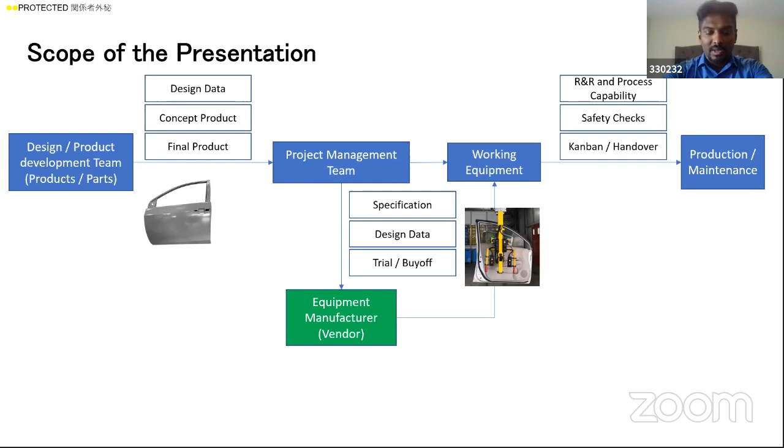So basically, even that is project management. You can see each and every activity in your home as a project management - it's like a one-time activity. You just take that process, execute it, and hand it over to the person who is going to use it. So our focus will be mainly on equipment and process design in this management scope. That's how you engineers will also start your career - you'll start with technical aspects of process planning, and then get into the project management field.

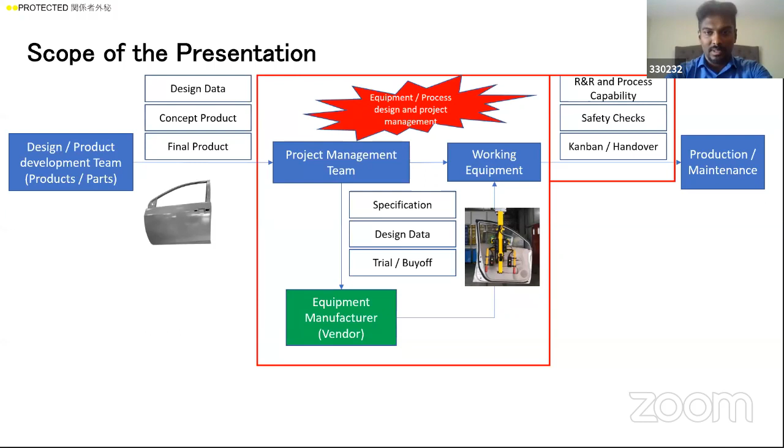So in this presentation, let's take this one door as an example. In vehicle assembly process, we'll have the shell body of the vehicle coming into the assembly shop, and we have to take this door out and send it to the door assembly process. Let's say we are going to build an assist for this. This door will be heavy, so one operator, one team member, cannot lift this door. They need an assist that can help them lift this door and send it to the next process. Let's assume we are in the project assembly department now, and we are going to build this equipment.

So what we will receive from the design department is the design of this door, concept of this door, maybe a concept vehicle door. We'll get that information from the design team, and now we are going to write a specification for an assist that can pick it and load it to the next station. So that's our job - let's say we are just breaking it down into a small project.

In an assembly like this, there will be more than 50 or 60 equipment. For example, if we are going for a big design change, from one model of a Lexus to the next model of Lexus, we may have to modify or buy 50 or 60 new equipment. This is how we start a project management, move forward, make it work, and hand it over to production with some studies that we do.

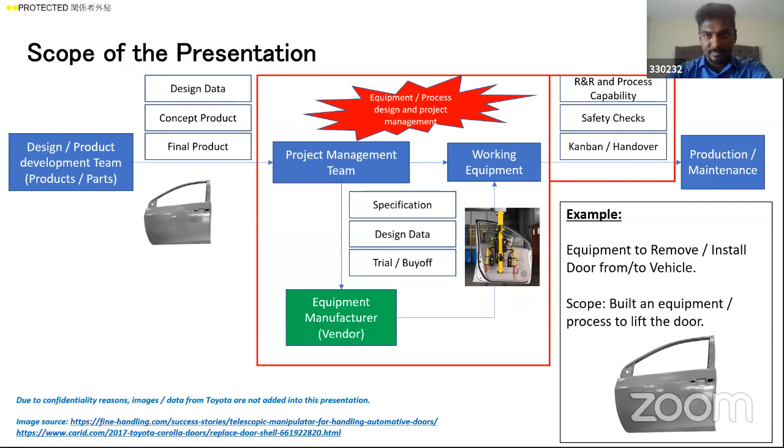Okay, I'll take that as a yes. Yeah, yes, Karthi, yes.

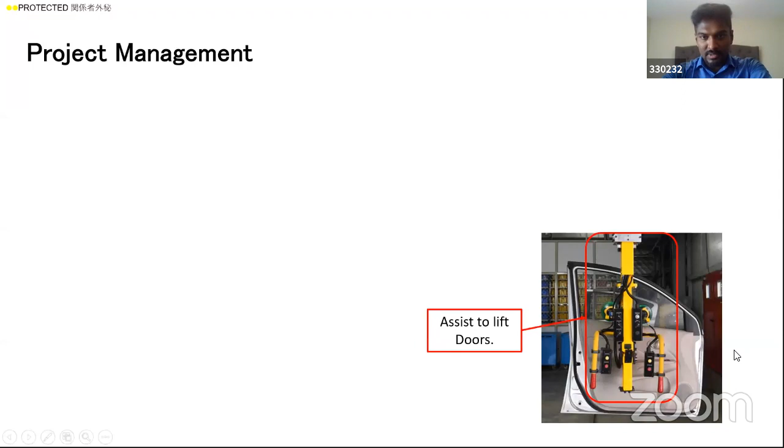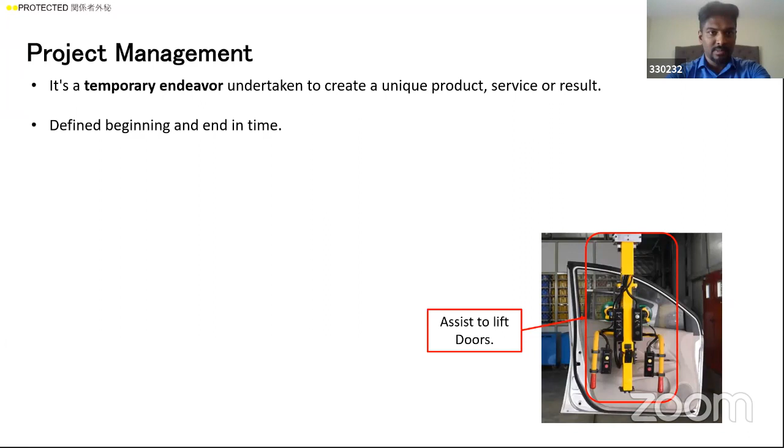So project management, let's say for this lift assist, that's what we are going to talk about. It's a very temporary endeavor, not a regular activity. It's a one-time unique activity with a defined beginning and defined ending. It's basic project management principles, unique for that particular operation, not a routine one. You start that project, implement it, and hand it over to production, and your scope ends right there. Project management has different phases: you initiate a project, plan for it, execute it, monitor for some time, and then close that project.

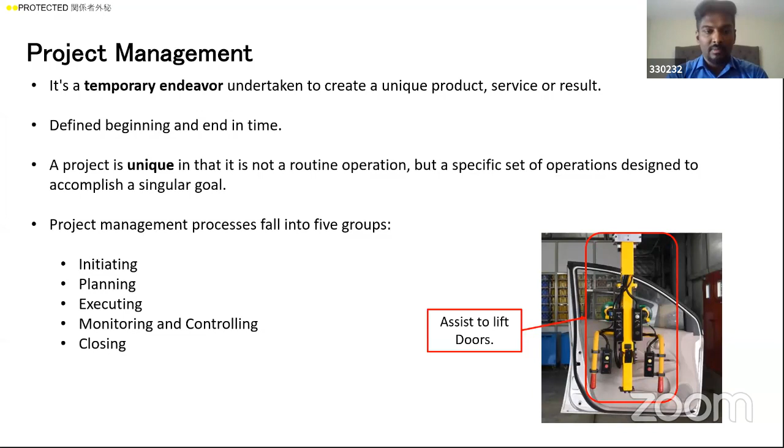The next type of project is the relocation project. You have a setup already in a different location, and you basically relocate that and make it work for the current shop, like in India, for example.

Then you do a kaizen project, where you already have a setup in your assembly shop making, say, 500 vehicles a day, and you're going to increase it to 1,000 vehicles a day. You're basically increasing the capacity of the shop. So what you do is add some equipment, increase the capacity of the equipment, or reduce cycle time.

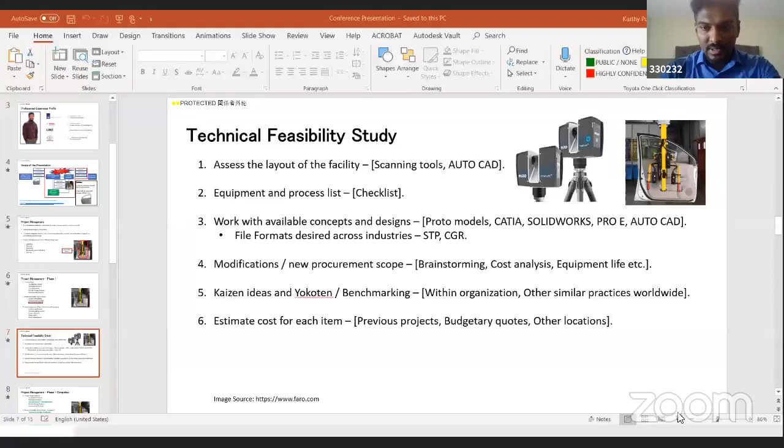Karthi, sorry to interrupt, but we are not able to see any presentation, we are only able to see you, not the presentation. Okay, let me check. So from this screen, you stopped looking at, are you okay? Yeah, we are now able to see the technical feasibility study. Okay, I covered this, you saw this one. Up to phase 1, we were able to see. Okay, so I hope until now you are clear on what we are talking about. Yeah, yes, okay, I didn't check the chat box yet, I'm not sure if there are any questions from participants. There are a few questions, but we can take this at the end of the session so that the flow of the session will not be disturbed. Okay, yeah, okay.

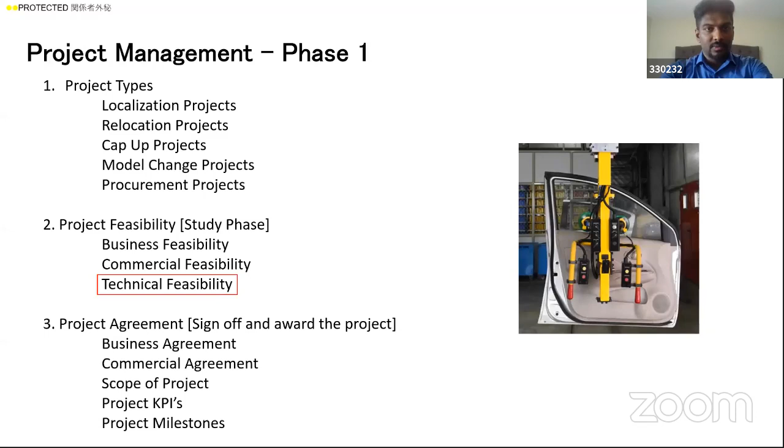Okay, so phase one is completed, and then we are going to focus on technical feasibility a little bit, and then move on to phase two. So in technical feasibility, the first thing is we are going to see if we even have a space to do anything. So first thing, what as an engineer you guys will be doing is you just take some scanning tools or take your tape measure.

Trust me, you will use tape measures and steel rules and other basic measuring equipment more than all these hi-fi technical scanning tools and stuff. As project engineers or project managers, you don't have to deal with scanning tools or design analysis tools directly. All you'll be doing is managing people to get these things done. But you should still know these equipment exist and their functionality and uses, though it's just based on your interest.

First thing you'll do is check the layout, whether you even have any facility to do the equipment, or can we even install the equipment here. You basically do that with scanning tools and AutoCAD, make some layouts and do a preliminary check. This is a high level check, because it's phase one, we just have to say okay, is this even possible to do here or not.

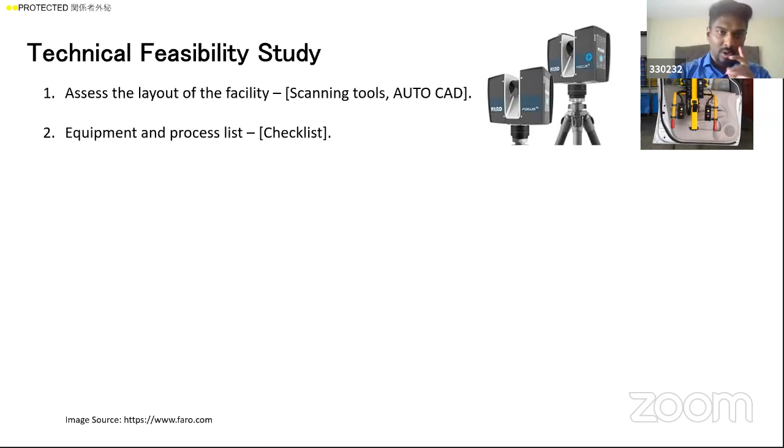Then you go for the equipment and process list. In our example, we just chose one equipment, but in an assembly line you'll have 50 to 60 equipment. So you have to list down all the equipment that need to be modified for a particular vehicle or model change, and list what needs to be modified or bought new. That's a basic small Excel sheet checklist where you list down all the equipment with asset numbers and everything.

Once you're done with that, you go with the available concepts and designs. The product design department will give you the concepts and the design, which can be in CATIA, SolidWorks, Pro-E, AutoCAD, whatnot. There are tons of software out there, but basically we use CATIA, SolidWorks, and Pro-E in Toyota. They may also give some proto models to us, depending on which phase of the project you are.

So let's say, for example, a design change or a new model launch. Initially we'll just get 3D models of a vehicle, 3D models of a door, whatever, usually in STP or CGR formats, which is the most commonly used format that people share to different vendors or locations. With that information you start checking: I have this 3D model, I have this layout, can I even make this equipment work for this in our industry, or in your plant, or in your home, whatever.

Then you go for modification or new procurement scope. As I said in point number two, you list down, let's say, 50 equipment, and you have to decide whether I'm going to buy new or modify the existing one. There may be equipment that's been working for 20 years and can still work - you just modify it a little bit or reinforce it, and make it work until the next model change, maybe 3-4 more years. Or you may have to buy completely new and make it work for the next 20 years. That's the decision you need to take, brainstorming with production team members and production managers.

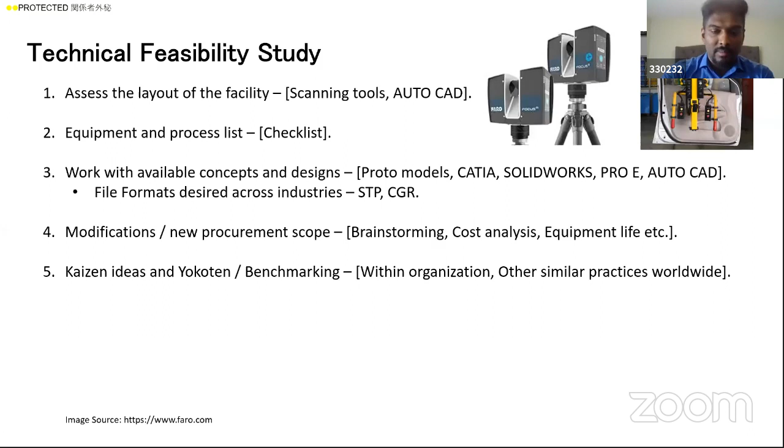Basically you do benchmarking. Once everything is done, you estimate the cost of each item. You've decided whether you're going to modify or buy new, you have all the Kaizen ideas, you know what equipment needs to be modified, and then you just put some numbers to that - get some budgetary quotes from different vendors. You'll have so many vendors who can make these kinds of assists.

Just talk to them and get some budgetary numbers, then attach that to the Excel sheet. So now whatever you have in your mind with all the technical knowledge basically gets turned into numbers, and with that sheet, you're basically done with your feasibility study.

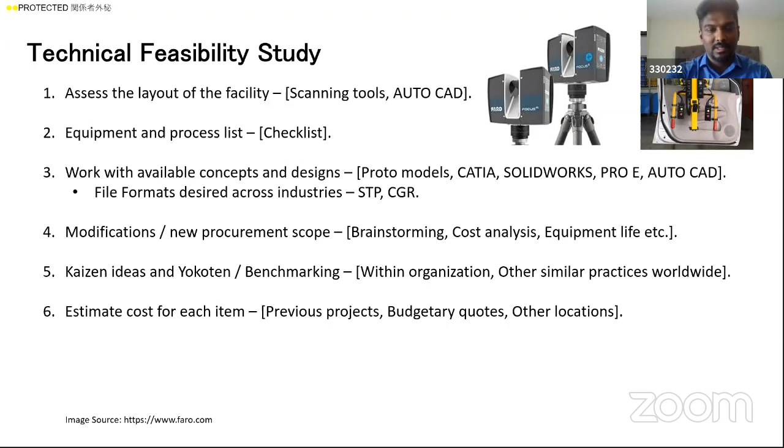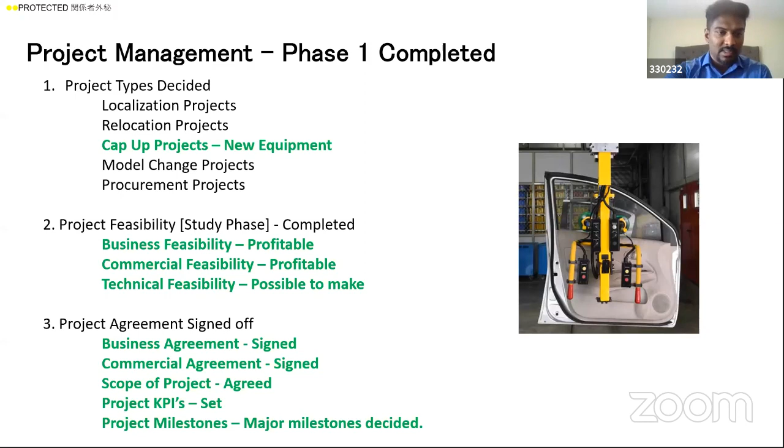This is where you engineers, when you go into an organization on the manufacturing side, will be doing all these things for the first phase of the project. Once that's done, phase one is completed. So let's say we decided we wanted cap-up projects for new equipment, and the feasibility study is done. We decided it's profitable, commercially and technically possible to make, and project management signs off on all these agreements.

We are entering into project management phase two. In phase two, we first start with budget approval. So we have a big number, and then we have to sort it down to a smaller, more accurate number and get it approved.

So let's say you may have a $3 million project. They will not completely give you that $3 million. You have to put proper numbers for every piece of equipment and then go for approval, and there will be a lot of cuts that you as an engineer will face when you get into an organization. So let's say they give you a $3 million worth project, and then they say you need to get it done at 70% of the cost. That's where all your technical capabilities and working skills come into the picture, for how to reduce the cost.

So you put together all these lists and get approval from your management. Once you get that money, you start allocating it into different scopes of your project. In our case, let's say it's only one assist, so we put that money into that assist - what you need for the planning phase, what you need for procurement, what you need for a vendor, and what you need later on. So for every phase, you allocate that budget, and then you establish a more detailed time plan.

Initially you had timelines like milestones - for example, start of production in May 2021. From that date, you work on all your detailed timeline backwards. Basically, you take the SOP and work backwards to create all your micro-level timeline.

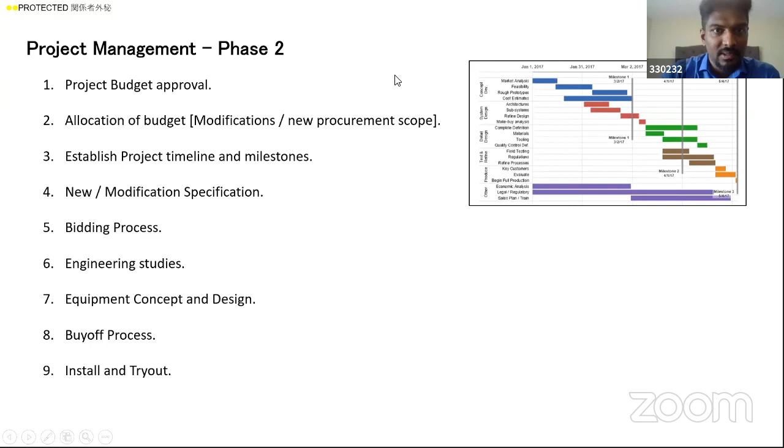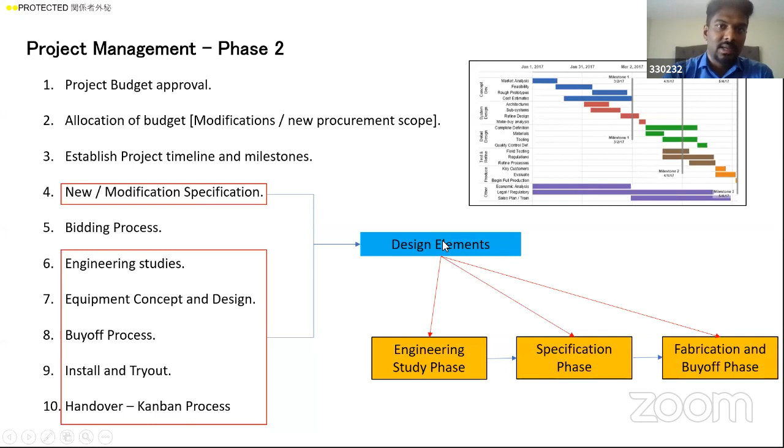In phase 2, I'm going to focus mainly on new or modification specification, engineering studies, concept design, buy-off process, install, tryout, and handover. I call these the design elements of project management. I'm going to split into 3 categories: engineering study phase, specification phase, and fabrication and buy-off phase. In these 3 phases, you will have some design elements, like process design, designing the process or designing the equipment.

First, we'll take the design element phase. So we are in phase 2 of project management, and inside that we are going to do design elements in a specification phase. When you're writing a spec as an engineer, you get into your shop, into your Excel sheet, and start making your specification. First thing is you need to know your constraint. What am I dealing with, what am I going to write a spec for? You basically get all the constraints put into that spec.

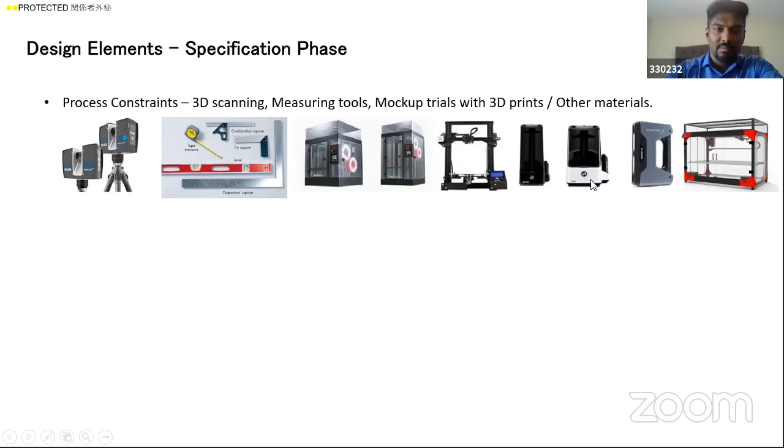For that, you use 3D scanning. 90% of the time you'll be using basic tools like measuring tape, scales, leveling equipment. Take pictures, put some specifications together, and then there's 3D printing stuff. We don't use 3D printed parts for final products, but some 3D printing is used for trials and to test whether a particular part will fit. Those kinds of activities are done with 3D printed parts. That's how you find out, okay, this may be the right product for me.

Then once you're done, you try to add all poke-yoke elements to that. Poke-yoke you might have heard many times from different subjects - it's mainly foolproofing. So anyone who comes and works in or uses that equipment should not make any mistake. As an engineer, you should write a spec, or you should design, with that in mind.

If you're a designer, you should design something which nobody can make a mistake, right? So you need to have mechanical control, pneumatic and logical control, and electrical wiring. Mainly pneumatic, mechanical, and electric will be the 3 major things on an equipment that you need to have proper focus on, and try to implement all the poka-yoke in the design phase itself.

So once you're done with a good design, your equipment will be good enough for like 90% of the cases, right? It'll be safe to operate, safe to work. But you may not be able to design completely 100%. You cannot put everything foolproof.

You may have to do some engineering controls later on, like for example guarding. Like you have a cutting tool, and then you may just have to provide a cover for that. So that's kind of engineering control. And then PPE comes into picture, right? If you cannot control in any way, then you use gloves or shield or whatnot to keep yourself safe.

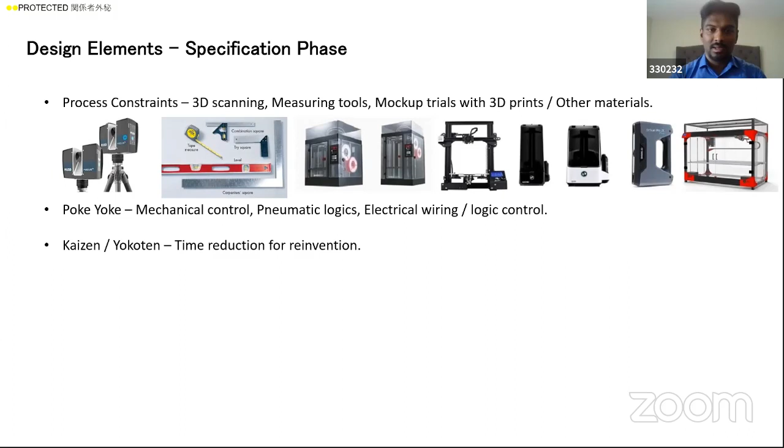So once you put all the poka-yokes into that specification, you take some Kaizen ideas, or you take some Yokoten from different industries, or within your own organization, you may have a different equipment which will work exactly the same. So you can take some elements from that and put it inside for time reduction. Basically, you don't have to reinvent everything. It's all there. You just need to gather everything and then put your own mind and try to do some Kaizen activity on that.

Another element on that spec is the ergonomic guidelines you might have studied. So it's basically like, let's say in Toyota, we have a standard that you should not lift more than 5 kilograms repeatedly for a shift. If anything more than 5 kilograms, you need to have an assist. So if I'm going to lift this box, which is more than 5 kilograms, I need to have some kind of assist to lift it and place it in a higher spot here.

So you have different guidelines. You have NIOSH, you have OSHA, you have different internal guidelines for any companies. So you need to gather all those things and then put that into your spec. So this is my guideline. This is how you need to design your equipment.

So in our case, our assist should not be heavy enough, like more than 5 kilogram when you operate the assist. So basically, it will all be controlled by pneumatic logic. You'll have a pressure cylinder which will compensate your lifting pressure, basically. So it should be less than 5 kilograms. So it should be very easy to take the door out and then put it onto a conveyor or put it onto the next process. So that's how the whole spec needs to be.

And then you focus on cycle time. So the vendor who is going to make that equipment, he should know, okay, this assist should work for 55 seconds. So in 55 seconds, you just take that door and load it onto the next process. If he doesn't know that, then he just makes some equipment which will take like maybe 3 minutes, which will not fit into your line. So you need to specify that.

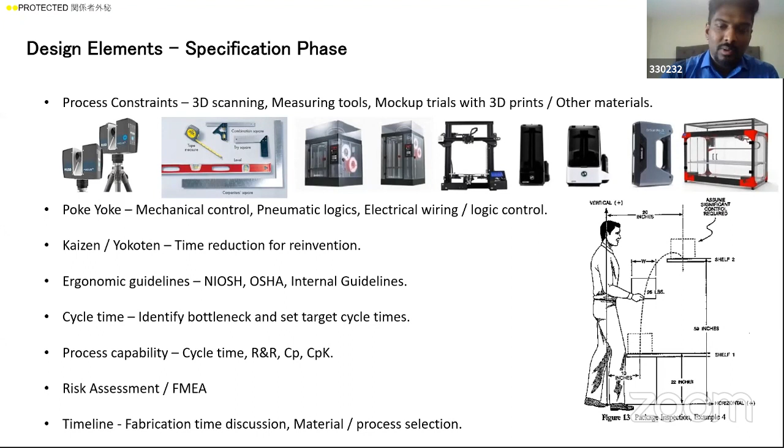Okay, so this is the design elements in a project during specification phase. So next is the engineering study phase.

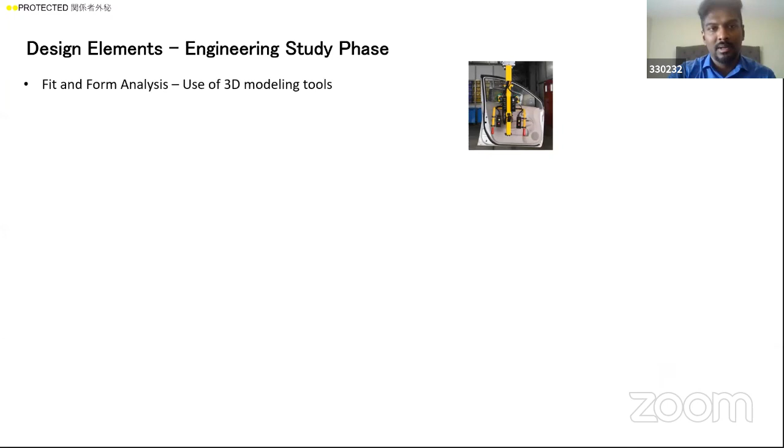As I said, for engineering study, first thing is you have to see whether you have fit form analysis, right? Whether the assist will even be able to lift this door or not. So let's say you have existing assist and you're trying to use that. In that case, first you have to see whether it will fit, whether we can modify it for the new door. We can use 3D modeling tools for that.

And then we do FEA analysis. Vendors will be doing that - they will see where the stress points will be in the assist. Usually, for example, if you lift the door here, your stress points will be somewhere in this main arm. So they will see whether this stress is capable enough or we need to reinforce it to make it work for the next 20 years for this heavy door.

Then they will decide the equipment life. These are all like a very predictive FEA analysis. It's not like a hard and fast number which you will stick to forever - this is like an estimate. You need to have some kind of estimate to move forward and say yes to the fabrication team, okay, make this assist. You cannot simply say okay, this is my sketch, I'm gonna move forward and make this equipment. So you need to have some kind of documentation that says okay this will be fine, this has, let's say, 20 years life, and these are the reinforcement points, and this is the design that I'm going to make.

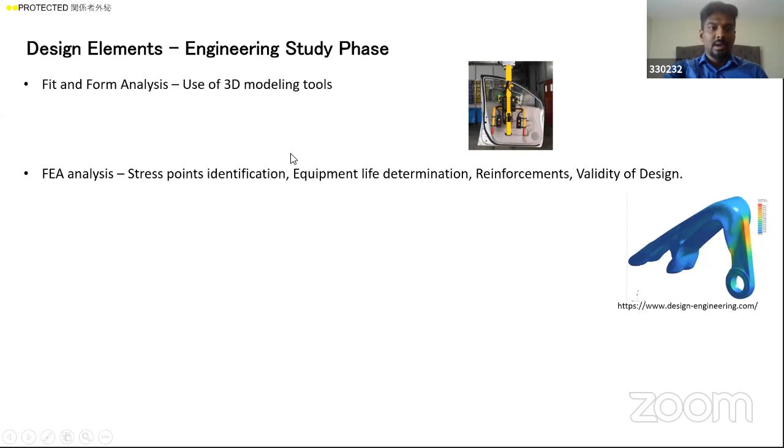And then once that is done, when you hang - as I said - whether the hanging structures, the structure that it hangs onto, is capable of that load, you'll have a tab loading study done during that time. And once everything is done, you will see if we can make a prototype out of that.

So in our example, they won't make any prototype because it's like assist - we cannot initially make a big prototype and then try to test it. But for small parts or small equipment, we can try to make 3D prints, or maybe some other crude process, like with different aluminum or maybe wood or something like that. You make a prototype and then try to see if we can use it.

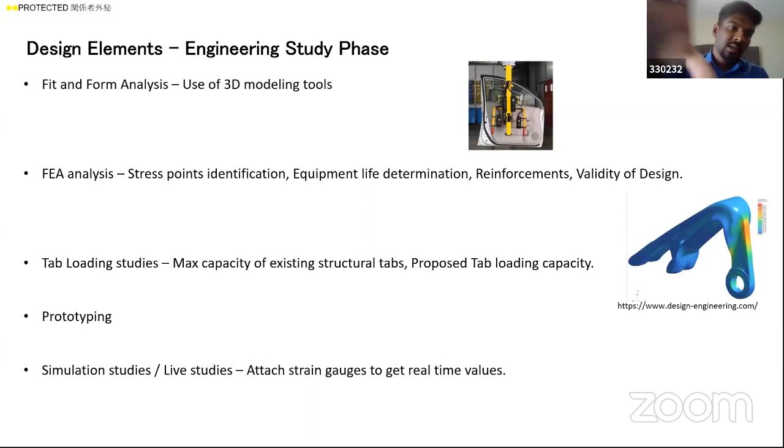And then once that is done, you do a simulation study or live study. So in this design phase, you do the simulation study and see where the stress points are. But once you bring the equipment into the shop and have the physical equipment, you basically do a live study. In live study, what they do is take a strain gauge and attach it into different spots - let's say you have 6 spots where you need to check the strain gauge. You attach that and read the actual values when the equipment is working. So basically, you're comparing FE analysis during design phase versus actual. That's where the whole engineering study gets closed - you do a study initially, and then make sure that it's good in the real time scenario.

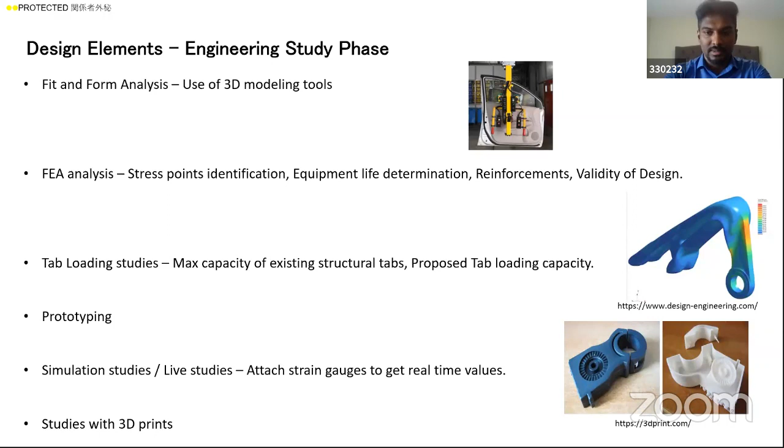As I said, we also use some 3D prints to do some studies. So that's where the engineering study phase ends, and then you have another design element during the fabrication and buyoff process.

Now all the design is done, and the equipment is fabricated by the vendor. So you go for a field check, basically checking whatever design they gave versus the actual, whether that is matching or not.

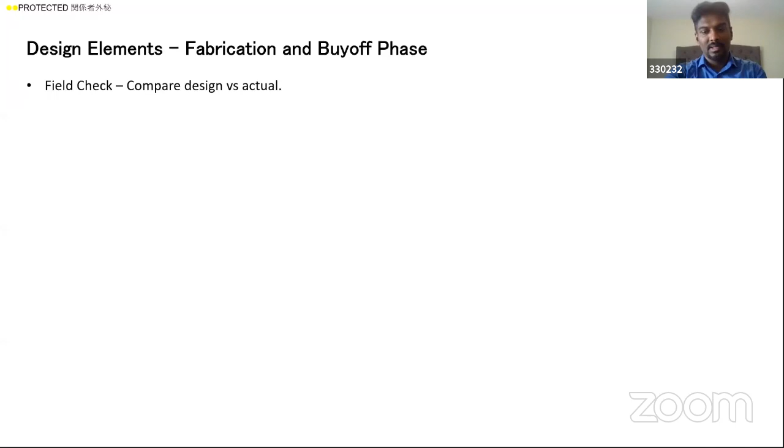Then you go with the buyoff checklist, or Kanban. It's always a pull system. If you get into Toyota, you'll hear a lot about the Kanban process. It's basically like a small card that says, I want this part, or a checklist. There are different forms of Kanban available.

So we use that checklist and check mechanical checks, pneumatic checks, electrical logic checks, circuit checks, and safety checks. There are like 100 or 150 checklist items that you basically check to make sure the equipment is made as per your specification.

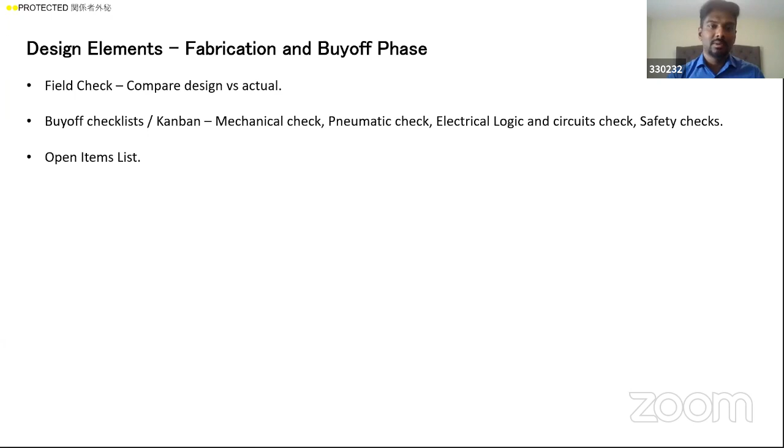If not, you put it into an open item list. So I wanted 100 things, but they could not make these 2 things, or maybe there is a deviation from my spec. So you just put that into the open item list, and then you go to your stakeholders.

Stakeholders are your next customer. We are all now project engineers, so we go to the production guys, production management, and ask, we wanted this, but we cannot get this in the equipment - do you guys agree? Is it okay for you? Can you manage? They will say okay, or say we want this, or we have to modify this.

You have to get that agreement from them and get a sign off. And then once they agree, you bring the equipment from the vendor, put it into your shop, and do an actual trial with the actual part.

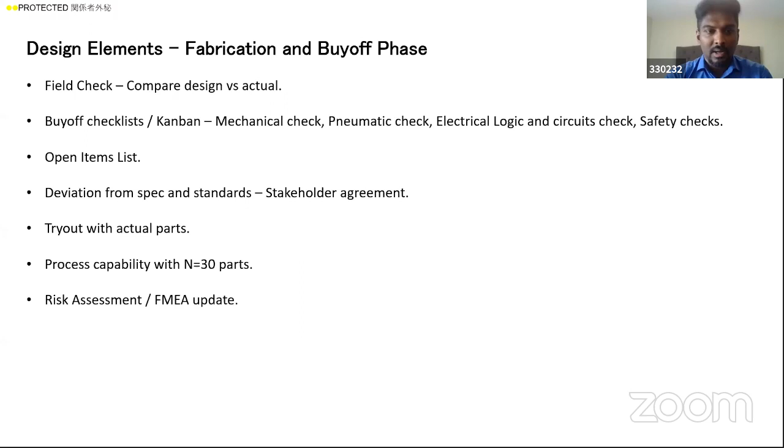Once that is done, your responsibility is to test for 30 parts and then prove process capability. Then do a risk assessment update, as I mentioned before, in the final phase of risk assessment. You update that and then hand over to production. So this is where your scope ends as a project engineer or process planning engineer.

Then we enter into project management phase 3. Any questions until now? I'm almost done, I don't want to take more of your time. I know it's the last session for you.

Yes sir, there are a lot of questions from attendees. Professor Raghuraman asked that project management for a process industry or job layout based industry like ship, aircraft, etc. is a very complex job. So how does the undergraduate student prepare for it, sir?

As I said, directly you won't be going into a complete project management scope from beginning to end. You'll be given a part of project management. It depends on what your interest is, what you studied before, what kind of experience you gained. In this example, as I've given, you're basically focusing on process designing. You'll be going as a process planning engineer or process engineer, and then do only that portion.

Or you may even get only the design portion. For example, in some industries, you may just design a part, like a small gear or a pinion. You just design that, and then do the CNC machining process, and then bring it back. So that kind of small scope you will enter into, and then grow bigger.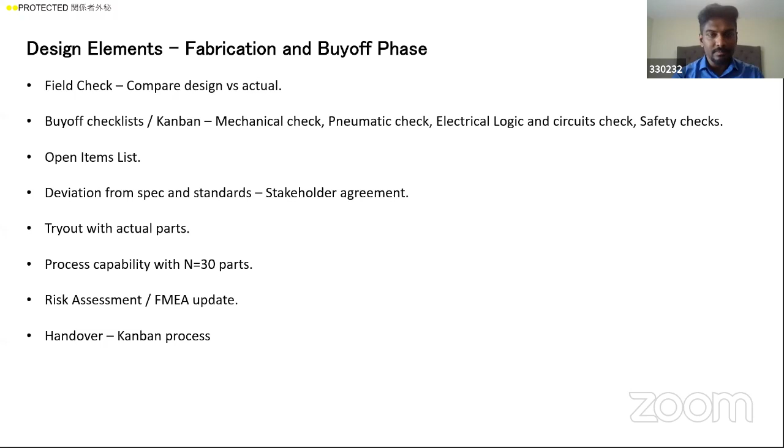There's another question from Sohan - how do you identify the weightage given to a particular stakeholder in the project?

So when we do phase one of the project, there may be some highlights on the stakeholders. In our case, let's say in Toyota in project management where I'm dealing, my stakeholders are production team members, production group leaders, managers - they are my stakeholders. I'm going to give the equipment to them, so they will be my stakeholder.

And then another department you will take is the safety department - they will come and check the safety of the equipment. So in anything you're writing a spec for, or having any meetings, you need to involve your stakeholders in every phase of the project. You cannot do something in isolation and then finally go and hand over the product to them. You'll be working together from the beginning - from the feasibility study until the project is done, you all will be working together.

So for stakeholders, I'll give a small list: the engineering department of whoever you're working with, their production management, their safety management, and their maintenance team. These are for a manufacturing setup. You need to take all the key departments and keep them involved. There will usually be a pilot team.

In our case, how Toyota is set up is we as a project organization are a separate small team, and the whole production team is different - there's production engineering and project engineering. We interact with the production plant, and they will decide one pilot person from every department to allocate for that project. Anytime this project team calls for a meeting, they have to be present and share their thoughts, because they are the ones who are going to use the product. So it's like an integrated process, not just one particular phase where you go and talk to them.